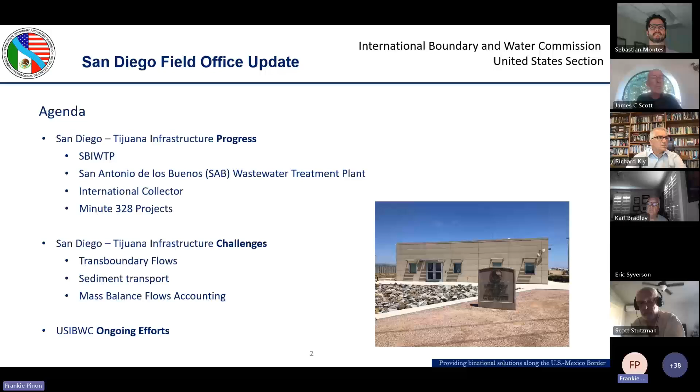Yeah, there's a lot of stuff going on at the border. What I want to first start off with is some of the things we're making progress on, such as the wastewater treatment plant repair and rehab work being done down at the San Antonio de los Buenos wastewater treatment plant, that we'll call SAB. The international collector, which is in Mexico, brings a lot of the flow to the plant. And the Minute 328 project, the combination of Mexican and U.S. project along the border.

I'll also talk about the challenges we have. I think we all know what those challenges are: the transboundary flows down the river, through our canyon, the sediment that comes across the border, and just accounting for all the flows in the San Diego, Tijuana wastewater infrastructure. And then we'll talk about at the end what we're doing to keep things moving.

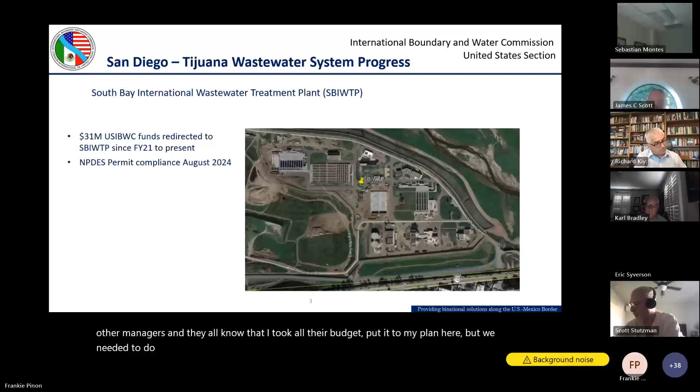Okay, as the commissioner mentioned, we have moved about $30 million from the IBWC budget to address the issues at our plant. It's very awkward for me, because when I was at the managers meeting at headquarters with all the other managers, they all know that I took all their budget to my plant here, but we needed to do that. The plant is currently out of compliance, and these repairs we're doing now—our target is to regain compliance in August, compliance with our NPDES permit, National Pollutant Discharge Elimination System permit, which is issued by the Regional Water Quality Control Board.

So this is some of the work that has been going on at the plant to bring it back up. These are the major components, so starting off with the influent pumps.

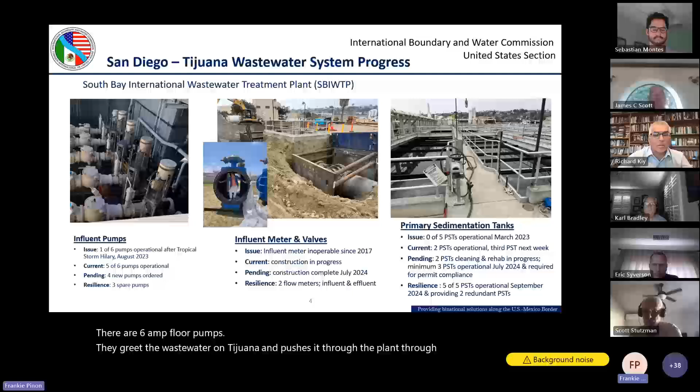There are 6 influent pumps that take the wastewater from Tijuana and push it through the plant to primary and secondary treatment. After tropical storm Hilary, we were down to 1 pump because of all the excessive flow, trash and sediment that came through with that storm, which took out all of our operational pumps except for 1. This is critical, we almost shut the plant down. Today we have 5 operational pumps, and we have 4 pumps either on order or getting repaired, so we'll have 3 spare pumps.

One thing we did learn from Hilary was that we must have spare pump motors on hand, so when we have these accidents we can swap it out very quickly. These pumps are about $500,000 each with about 9 months lead time for the pump, so we'll have some spares.

The influent meter is a project we've been trying to complete. We started this over 2 years ago. This will give us a second meter to measure the flow coming into the plant. We've since been relying on the effluent meter at the other end.

Here's a picture of our commissioner inside one of these valves, just to give you an idea how large these are. These aren't valves you pick up at Home Depot, they're custom made. I think it took us about 1.5 years to get these, it's a lot of time to get this work done and get the material we need. This project will be completed by the end of this month, and again this will give us redundancy in our metering.

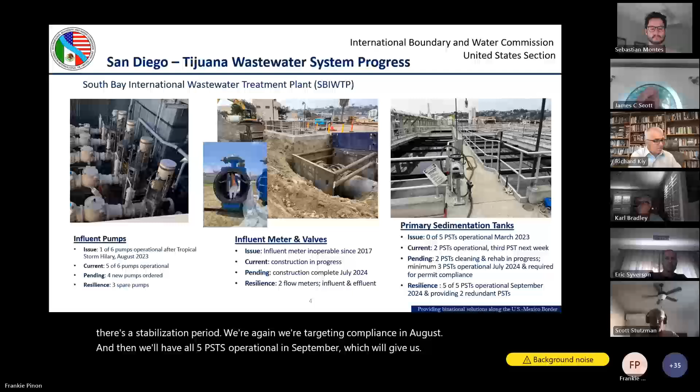Junction box 1 is also critical to this plant. This junction box is a concrete box with a metal pipe going in and a pipe going out to the plant. This is where the flow from Mexico comes into the US, comes to this box, and then goes to our plant. It's been inoperable for a number of years, the valves have broken off or are stuck in position, so you've not been able to control the flow of the plant. So whatever comes from Mexico, we treat, even if it's above 25 million gallons per day. This is the source of a lot of our problems, the excess flows over a long period of time.

So we awarded the contract a while ago. We're in the 90% design phase right now, and our schedule has us constructing and completing this new box, J1, in February of next year. This will give us control of flow of the plant.

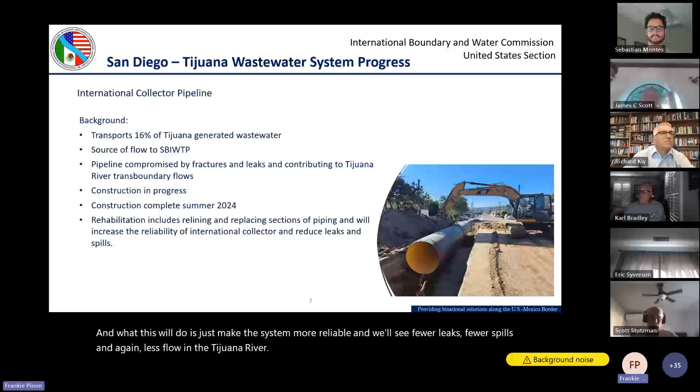So I just want to summarize the previous slides and all the improvements we're making. Junction Box 1 is supposed to be done in February, giving us control of the flows to the plant so we don't suffer from the excess flows.

The international collector is to be done later this summer, and this will prevent spills or flows into the river.

And then we have the wastewater treatment plant here. This is supposed to be operational, partially, in September or thereabouts.

Pipeline 1A was ruptured back in July 2022, which caused a lot of problems for us. We lost some capacity here, so instead of flow going through here, we were getting a lot of that flow into the plant.

Excess flows over a long period of time. This has since been fixed, but we're having some trouble getting it back online. This line right here is adequate for now for flow.

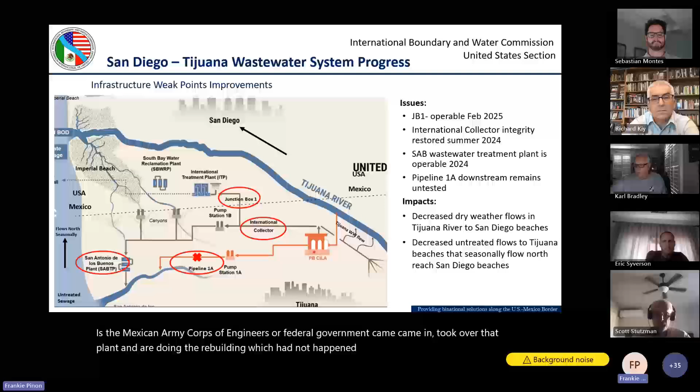There's a part of the story maybe not everybody knows: the Mexican Army Corps of Engineers, or federal government, came in and took over that plant and is doing the rebuilding, which hadn't happened before. They have double shifts of Mexican Army construction workers from all over the country doing it. A couple of points on the timing.

They've said it should be online by the end of September or October 1st, when they plan on flipping the switch at the plant. They readily acknowledge there may be multiple problems when they see what happens when they flip the switch on, but they're committed to that. When you saw the pictures of the tanks while we were there, they put up the first wall on the side of the tank while we were there.

It's a little hard to envision in a few months, but for oversight, it's part of the minute order, which relates to the USMCA treaty, that our government and our official, with the chair, go to these meetings to ensure it's done. I think there'll be multiple issues with it, but there is a plan to ensure it keeps going, and there's a lot of scrutiny on it.

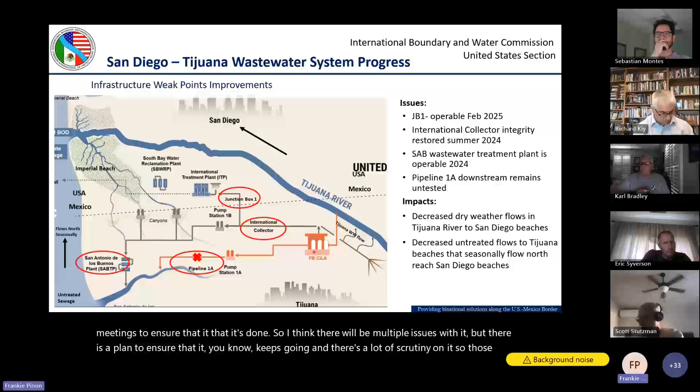So those meetings are between their diplomats, right? Because our USIBWC is under what? It's under our State Department. That's why the U.S. consulate is the one organizing these meetings, and why U.S. Congress members are going.

Yeah, I have a few more questions. So what you said, that the international collector is being rehabilitated — so it's not in service right now?

We are getting close. We're averaging right now about 18 million gallons per day at the plant, out of 25.

When the international collector is being repaired, flow is coming through PB CILA instead, being rerouted through the federal government's pumping station. PB CILA is the Mexican pumping station — it just pumps out of the river. So whatever's in the international collector now is being rerouted, and goes to Tijuana, but it's not at full capacity. But my point is, the only way we get water through the plant is through the international collector. That's correct.

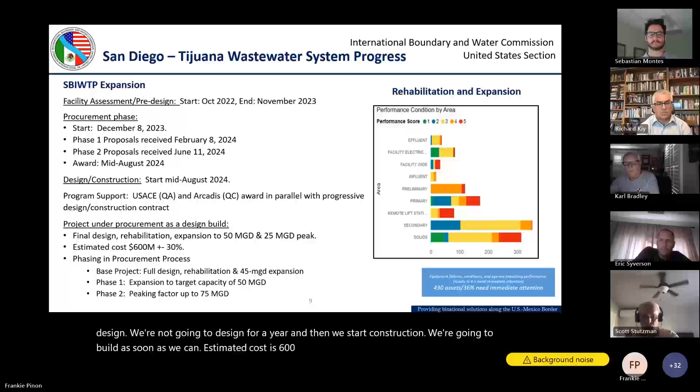As soon as we award this project, we're going to start the design and build. We start designing as soon as we have something to build, and build right alongside our design — we're not going to design for a year and then start building as soon as we can. The estimated cost is $600 million, give or take 30%, which is a lot. We won't know the exact cost until we go through negotiations with our selected contractors.

We have the project in phases based on our funding. Phase one is 45 million gallons per day. Once we get additional funds, we move to 50, and then the last phase, if we're fully funded, is 600... it's 50 million gallons per day with a peak up to 75 million gallons per day.

As far as the funding right now, we had 300 million from USMCA. We recently received another 100 million, and another 100 million budgeted to IBWC. So we're probably short maybe 200 million based on the 600 estimate. But again, we won't know the cost until we finish negotiating.

Okay. Are there any more questions from the board?

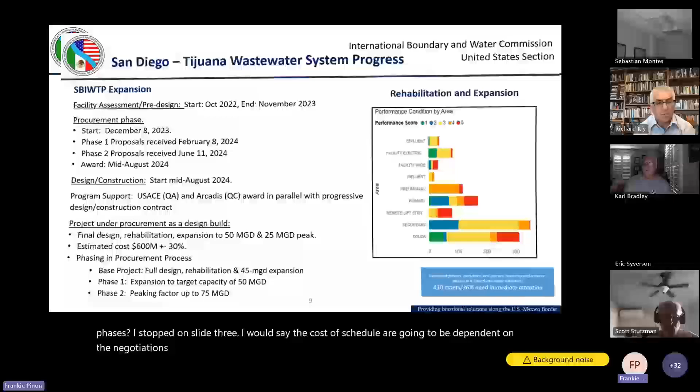That's the question I get the most from citizens: okay, we're going to expand up. Obviously, the peaking factor of 75 million gallons per day is approximately 90%, or close to the heaviest flows we've seen. I'm just guessing when I talk to them, or giving a slightly educated guess, hopefully, of what kind of time frames we're looking at on the whole project. I don't want to overly commit you, but if you have any comments, that's great.

They may help us, but we're talking a few years, then, right? Two years for what, for the construction start? No, that's just the start to get into the work. Like, for instance, phase one, when do you think we would get the phase one expansion to target capacity?

We'll tell you, as far as the schedule and cost, we'll have that in about a month, once we negotiate. My guess is we're going to start construction as soon as we can. So this could be a long phase one or base project. Completion is probably two or three years out. So that's my guesstimate. We'll work on the rest of the funding.

All right, thank you. Got a little hint, three years, maybe up to five years. So it just depends, again, on funding and contractors.

Okay, thank you. Oh, sorry, Ryan. No, okay.

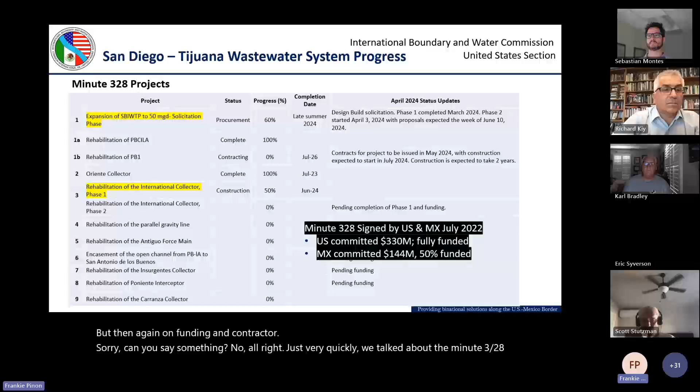Just very quickly, we talked about the Minute 328 project. There's a list of projects, and they're all projects at the border. As the commissioner mentioned, the U.S. has committed $330 million to the project, that's primarily just the plant. Mexico has pledged $144 million, and they have funded half of that.

The fact that they've only funded half of that doesn't mean they're not committed. Their funding process is such that if you don't spend the money by the end of the year, you lose it. But they're only going to fund it if they're ready to do the work. So we feel they are committed.

There's a lot of projects here. I highlighted the ones that are ongoing right now. This is the treatment plant, and this is the rehab of the international collector, which is ongoing. Next slide - lots of pipeline rehab projects, pump station upgrades. This is a good one.

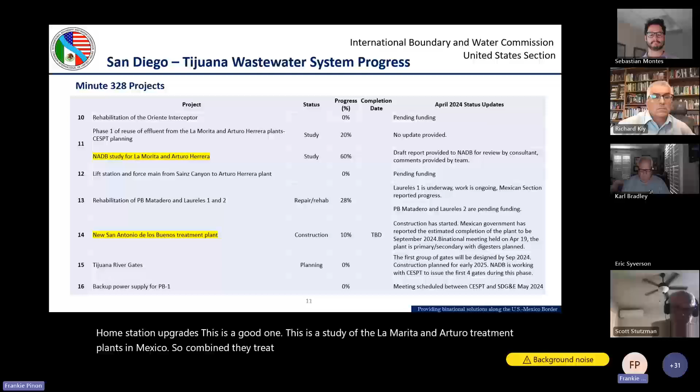This is a study of the La Morita and Arturo Herrera treatment plants in Mexico. Combined, they treat about 10 to 12 million gallons per day, secondary treated, just like our plant, and they just dump it in the river, adding to transboundary flow. So this study is to reroute this treated water back to the reservoir or some other better facility.

And then there's the SAB plant construction, but there's a whole up to 16 of these projects here, funded by Mexico and the US in some combination. Okay.

Morning, I have a question about that slide. Okay, we can take it back. So number 13, it says rehabilitation of the pumping station at Matadero, Laureles. So I know we've had some flow across Matadero Canyon lately. Can you tell us a little bit about that project?

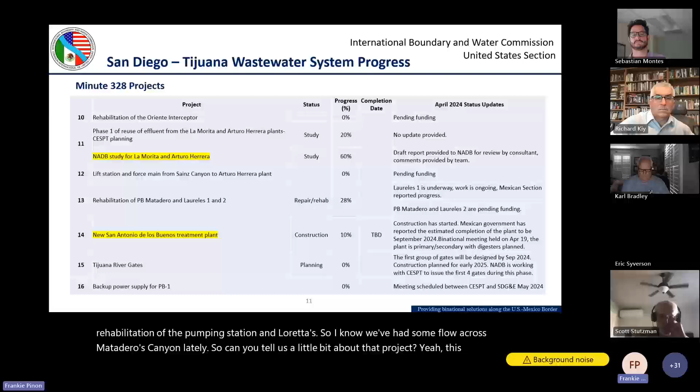Yeah, this one is funded, it is underway - addressing the flow that goes through the canyon lately.

I'm told the latest is that this will be partially coming back online later this month, so we'll see some reduction in flow. Number 2 is not funded, there's no contract yet on the Matadero. This Matadero is contributing to the flows through smugglers, and yeah, this has been a problem for us.

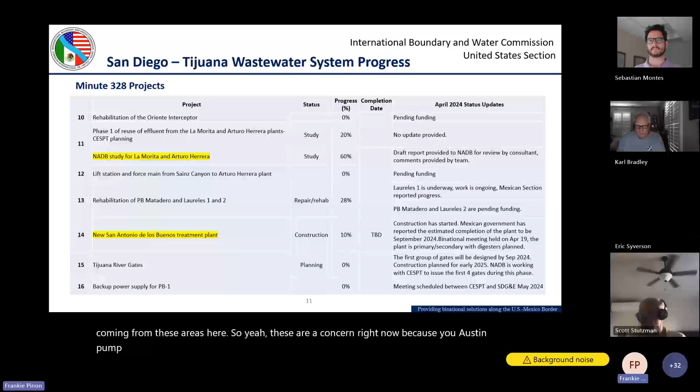I'm actually going across the border with my counterpart tomorrow to view the flows coming from these areas. So yeah, these are a concern right now because all the pump stations are down, and these are contributing to flows to the canyon.

Morgan, is the flow coming down to smugglers now because PB Matadero is not working? I would say it's partially working. There was a leak, a rupture over the weekend, a big surge of flow. They fixed that, so the flow should have gone down since then, but there still is flow. That flow is coming from the pump station. Not sure why.

I don't know if the public knows, but Matadero's Canyon, Laureles, is both about 5 miles long. Matadero, when it crosses the border, we call it Smuggler's Gulch. Laureles, when it crosses the border, we call it Goat Canyon. It's a geographical feature, a river, water flow across the border.

I just want to make a brief comment that came out of the visit to Mexico. The commissioner may talk about it more, but it's just a brief comment. There are unidentifiable flows occurring right now that the Mexican government does not know where this volume of water is coming from.

Sounds bizarre, right? And they say, well, don't worry, it's not sewage, it's clean water. Well, if you don't know the source, how do you know it's clean water?

Then the other big issue for USIBWC is water goes in the river, it's mixing with dirty water regardless, and creates flow issues with some of the questions you're asking earlier. So that's something they are investigating. We hope to get more information next week.

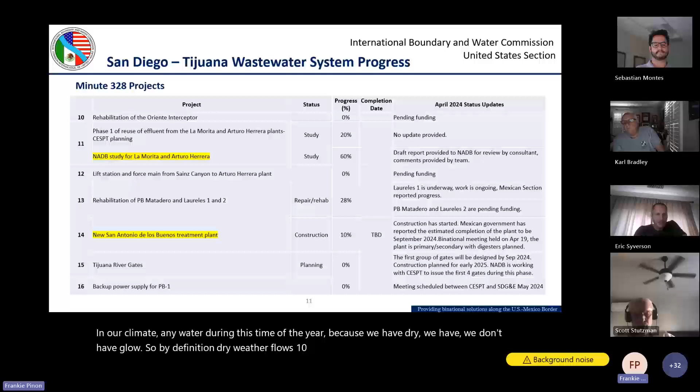Well, you know, in our climate, any water during this time of year, we have dry weather, we don't have flow. So by definition, dry weather flow ten months out of the year is de facto sewage. That's the definition the EPA gives.

And I know I see those rehabilitation of the Matadero and Goat Canyon and Smugglers, but I was looking at the EPA plan, and those various pump stations are to be decommissioned under the EPA plan. So it seems as if they're rehabbing them, but if this project goes full blown, they're going to in fact be decommissioned.

And then all that volume, according to the EPA report, is 12.7 million gallons a day, and that will be coming into the United States. Of course, Goat Canyon and the Smugglers Canyon collectors have to take up that volume, but the pipes aren't sized for that yet. So there's some coordination issues here too.

This is some glaring item that will need to be addressed, because part of the problem that kills our plant is sand, rocks, gravel. If you have that kind of flow coming in, that kind of sediment is also going with it into our pipes. So that means those really have to be completely retrofitted and resized. Those are glaring scopes of work that need to be addressed.

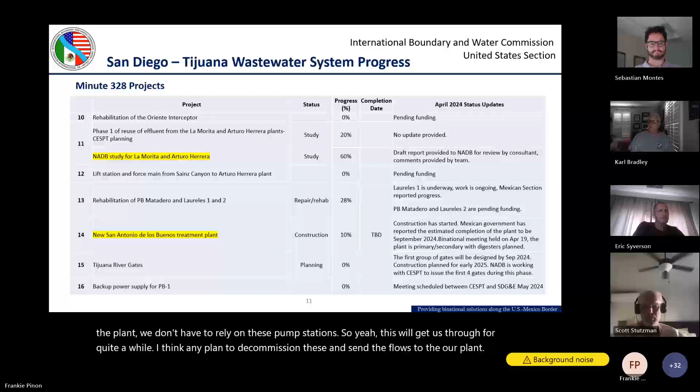Okay, and I would say that is a very long-term plan. Ultimately, we'd like to not rely on the Mexican pump station once the treatment plant capacity is increased to 50 or 60, and we just gravity flow from Mexico to the plant. We don't have to rely on its pump station. So yeah, this will get us through for quite a while. I think any plan to decommission these instead of flow to our plant is way out in the future. But good thoughts, I appreciate it.

Oh, also one other thing. You talked about refining dry weather flows and sewage.

The flows that are in the river are definitely sewage, a mixture of the treated water from the treatment plant. There's groundwater from the rain, and whether that's still impacting or not, I don't know. But Mexico claims we did have a lot of rain this year, and that does contribute to groundwater seeping into the river. There's likely some potable water leaking and everything else. So not a lot to it.

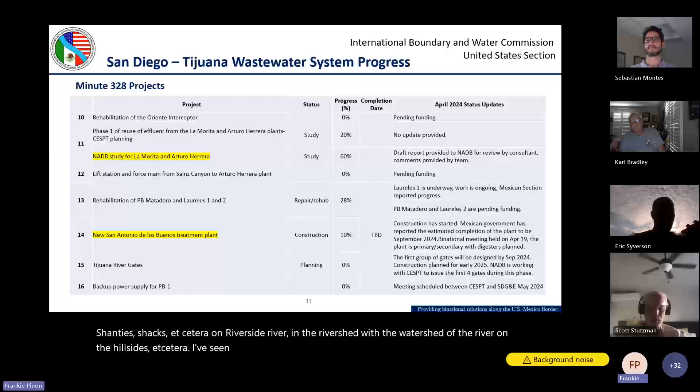At our last meeting, our colleague did a presentation regarding some of the unconnected sources of pollution, including some of the factories, but a lot of shanties and shacks that are on the river in the watershed, like big on the hillside, etc. I've seen those, and they appear to be growing in number as people are attracted to the water area.

We also know that there are subdivisions that aren't connected - that's part of that report. It would really be great if we had a sort of top-down view of where these sources are and what is going to capture them in terms of the work that's being planned and done right now.

To me, there's the question of whether all of this investment in infrastructure on both sides of the border is actually addressing the new development, like all the big informal projects. And how much is going to be left over on the Mexican side that still is going to make its way across the border. I guess the question is whether those flows will be captured by the treatment plant and its capture infrastructure.

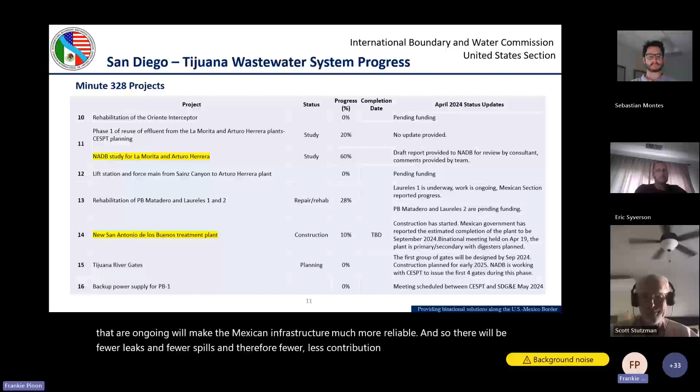Well, I would say that the new infrastructure, all the projects that are ongoing, will make the Mexican infrastructure much more reliable. So there'll be fewer leaks, fewer spills, therefore less contribution to the river. I'm not sure that any of these projects are new developments with new pipelines going to new developments - I think they're all existing pipelines that are being repaired or rehabbed.

I'm not sure if I answered your question. I think my question really requires a top-down satellite view of the watershed, where the pollution sources are, and which parts of the current and future infrastructure improvements are going to capture it. We don't have that - it's very difficult, even for somebody like me who follows the structure here, to have a comprehensive view of source and treatment, and what's left over, what's the remainder of that fraction.

Let me answer that. Next slide. Someone else.

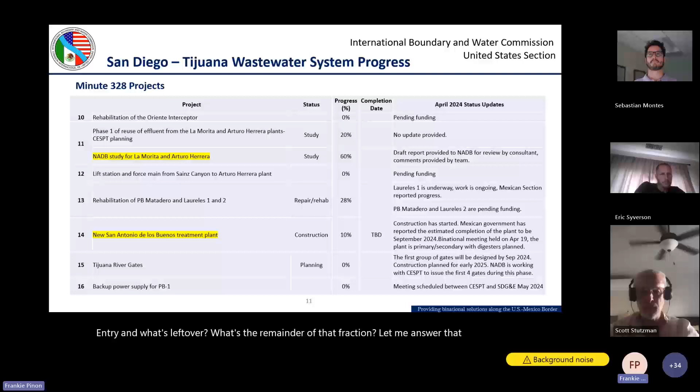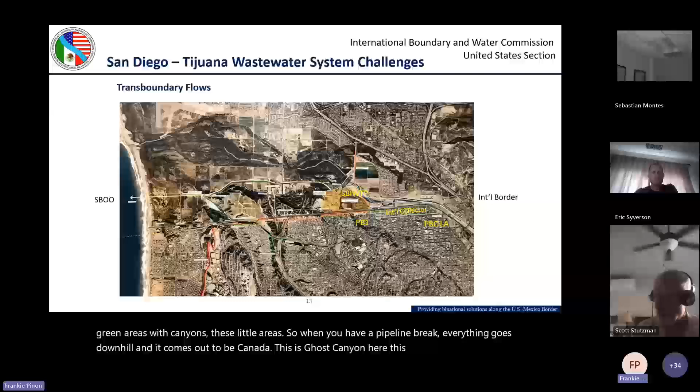Discharges out the beach here. We also get discharges through the canyons - these green areas are canyons, the low areas. So when you have a pipeline break, everything flows downhill and comes out to the canyon. This is Goat Canyon here, this is Smuggler's Gulch, this is Del Sol, Silva Drain, and we got Stewart's Drain over here. We try to capture all the flows and they go to the plant.

Okay, this is just a diagram of the Hollister pump station. And this is currently out of commission.

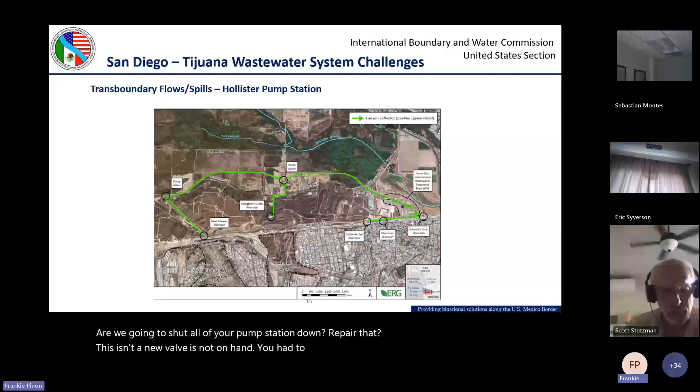I don't know if I mentioned this before, there was a surge tank. So, last month, a pressure relief valve on a surge tank at this pump station was stuck open and caused a spill. We had to shut the Hollister pump station down to repair that. This isn't a valve you have on hand, you had to order it. At the same time, we had to clean out the surge tank, which was filled with sediment. That was the cause of the valve failure.

So this is out of commission right now. This is Smuggler's Gulch Canyon collector, it gravity feeds to the pump station. This is the Goat Canyon collector, it gravity feeds to this pump station, and then this pump station goes to Hollister. So if Hollister goes out, we have to shut this canyon collector down, and that's the case today. That means all the flow is not captured, it just goes downstream. I know this is starting to flood here, and it's come over this direction.

Before we could put that tank back in operation after cleaning, we have to get it certified. We did that last week. Results of the testing for certification we should get any time now, and hopefully they'll tell us the tank is good so we can put it back in operation. It's an old tank, so we're crossing our fingers.

We're already looking for a new tank. We're also considering a new piping scheme where we don't need these surge tanks, so we're looking ahead in case we have to replace these tanks and can't put them back into operation. But we hope to get this back into operation as soon as possible. We do know that these flows here are just unacceptable, and I am going across the border tomorrow with my counterpart to see where these flows are coming from. I know they're coming from the pump station upstream, but if there's something we can do to reduce or stop these flows, we will.

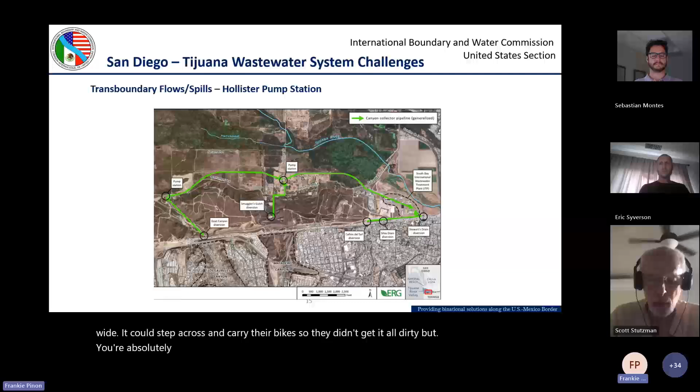You're absolutely correct. I had a discussion with the city. We will have signs; next time there's a spill, an officer will have a sign on both ends. Thank you.

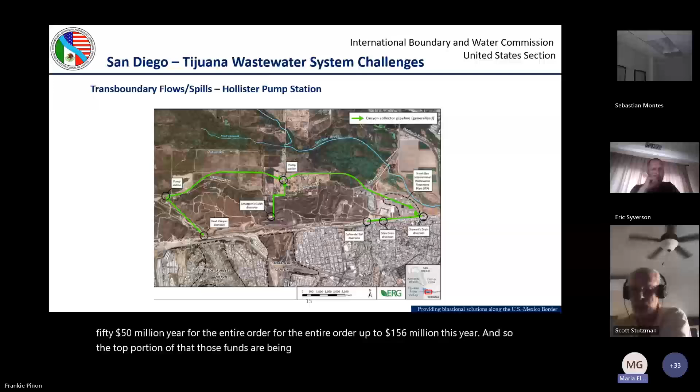But part of that, and what Morgan talked about, is our construction budget was tripled. It went from $50 million a year for the entire border up to $156 million this year. A good portion of those funds are being allocated to this plan. I can't share the exact amount because I'm still waiting for Congress to approve my operating plan. We're almost at the end of the fiscal year, but processes are processes I must adhere to.

Anyway, we did fund that water quality monitoring we're also going to be doing on the canyons, and this is now being integrated permanently within our budget. That's all I wanted to add.

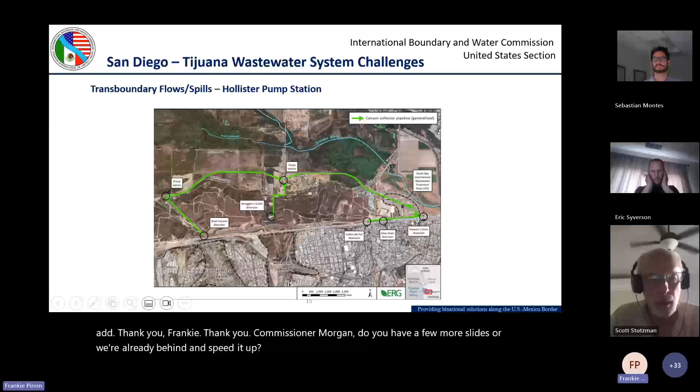So the flow comes in, goes into the box here, and then it gets pumped back to a pump station. When you get all this sediment, it clogs up the box here, and we have to shut down. And when we shut down, then we have transboundary flows. This is an ongoing problem, one that's gotten worse in the last year.

Next slide. And we also get this sediment, not just in the canyon collectors, but also coming into the plant, and it ruins pumps and valves. It causes a big problem. Next slide.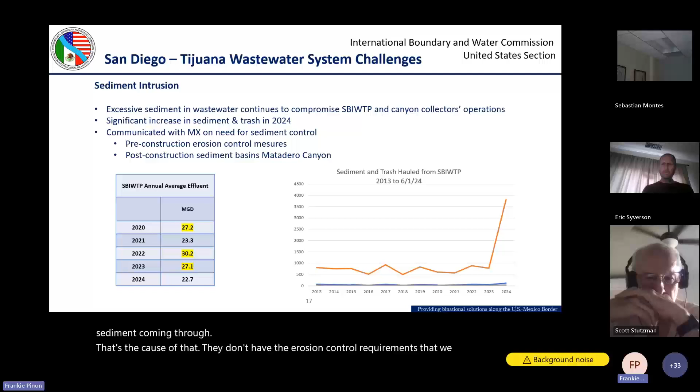Now somebody said, well, you get all this excess flow into the plant, of course you're gonna get more sediment, but this is huge. We've actually averaged 22.7 million gallons per day this year, much less than 3 out of the past 4 years. So there is more sediment coming through. As the cause of that, they don't have the erosion control requirements that we have in the United States. There's a huge construction project on the other side of the border from Smuggler's Gulch. No erosion control. All the brush has been taken away.

Sediment is a constant issue with us, and we always bring that up in our meetings with our counterparts. Next slide.

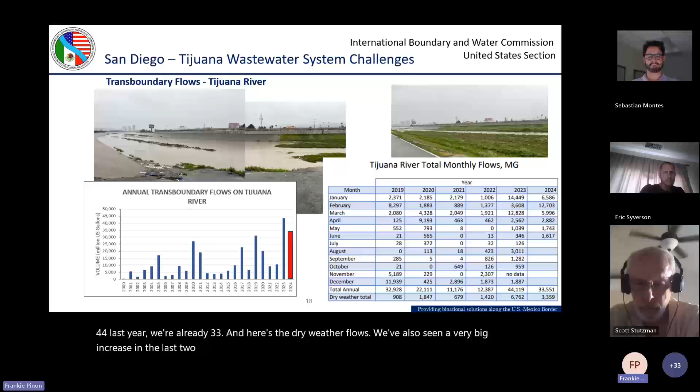Okay, this is just to show you the flows in the rivers. So we're getting a lot of flows. Last year was big, and we're only halfway through this year, and we're already up to 33 million gallons so far. This is a comparison of each year, total annual. 44 last year, we're already at 33. And here's the dry weather flows. We've also seen a very big increase in the last 2 years. Okay, next slide.

Okay, this looks pretty messy here. This is a slide given to us by CESPT, the wastewater provider in Tijuana, Mexico. It just shows all the flows we should expect during dry weather season: zero flow in the river, 25 million gallons per day at the plant, and up to 50 million gallons per day down the SAB.

This is kind of hard to focus on, but we've been averaging 45 million gallons per day in the river, 18 million gallons per day at the plant, and then down here, instead of 50, we're seeing 22.

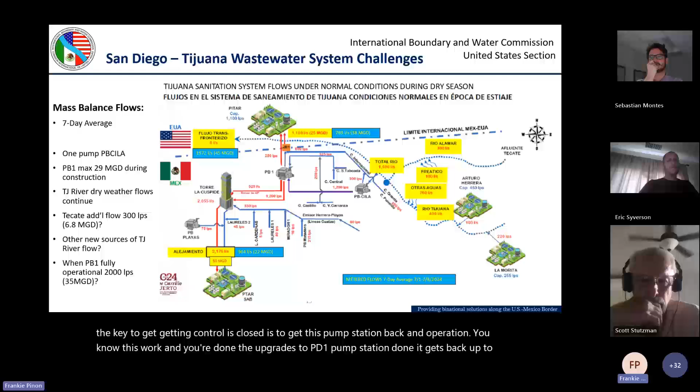So this tells us, I update this every day. We have meters here, here, and here, all the outputs of the system. This gives me a good idea of what's going on. It tells me we're not getting enough out of this pump station here. We know that. So the key to getting control of these flows is to get this pump station back in operation, get all the upgrades to PB1 pump station done and back up to speed. Right now we're seeing about 12 million gallons per day, and this should be seeing 35.

So this is us talking about the mass balance, where everything's going, or where the sources are. This is what we're getting at. We have tables that we work with our Mexican counterparts to plug in the values. We do the analysis, the mass balance, to see where the flows are coming from, where they're going, make sure everything equals out. This gives us an indication if something's going wrong, not just that we got too much flow in the river, but that there's not enough here. It points to this pump station right here.

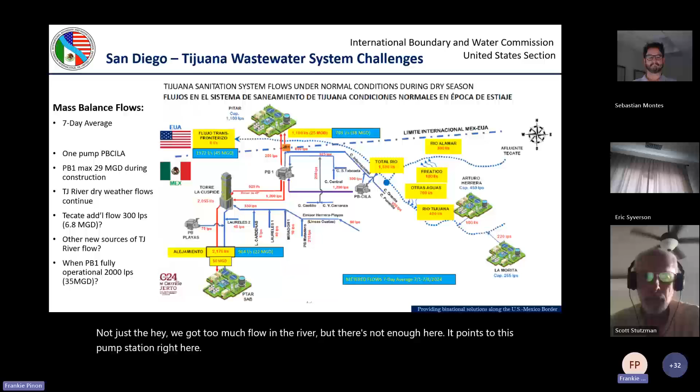And that's with one pump on at PBCILA. We are diverting some flow to the river. It's not much, and these projects should be done in the next couple of months. Then we should see PB1 start ramping up again, and additional pumps at PBCILA coming online, which will reduce flow in the river. Okay, next slide.

Okay, this is the last slide. This is what we're doing, what we've been doing, and what we'll continue to do.

Continue with the repairs and upgrades to the plant, continue with the expansion. We have regular meetings at the commissioner level, as well as at the principal engineer level. We're monitoring the Minute 328 projects, also the SAB, and sediment control is a constant, it's always on the agenda. We're trying to get them to implement some erosion controls in their projects.

I have bi-weekly meetings in my office with my counterparts. We go over specific projects, make sure we're coordinated. We accompany CESPT and my counterpart monthly, driving down the river to see where all the inputs are coming from and note the conditions. After we've done it a few times and seen big changes or a lot of flow somewhere, the next step is to investigate that. Then we get into mass balance reports, sharing data with our counterparts, trying to figure out where all the flows are going and coming from, ultimately to try to reduce the flows in the river.

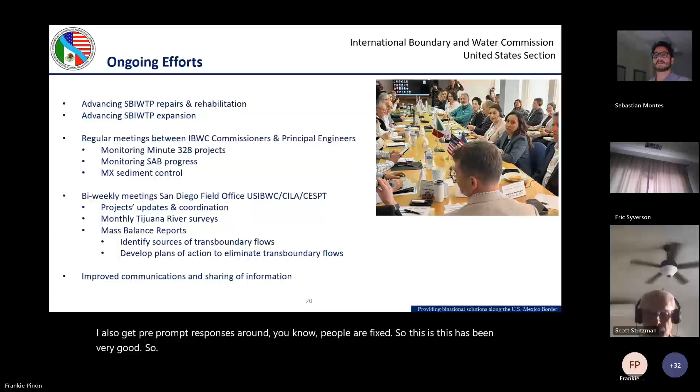First of all, thank you so much for actually dealing with all this. Everyone's probably telling me so many things, but the fact that you're actually doing it, I really appreciate it. I wanted to ask specifically about the Hollister pump. In your expansion design, is there a way to create redundancy with that pump? Because clearly it being out of commission has a large impact in many different ways, and because it feeds multiple different avenues, it seems like it might be a powerful place to have redundancy, if that's part of your expansion.

Good question. The pump station has 4 pumps, and we only need 2 pumps, so it already has 2-pump redundancy. The problem is really the sediment coming through. I think our plant design, we hope, will include some sort of sediment removal, at least for the plant. And we're looking at ways to reduce the sediment at the canyon collectors. Actually, our plant operator is working on some design for trash and sediment collection. I think he's going to present later on tonight. So yeah, it's really a sediment problem at Hollister.

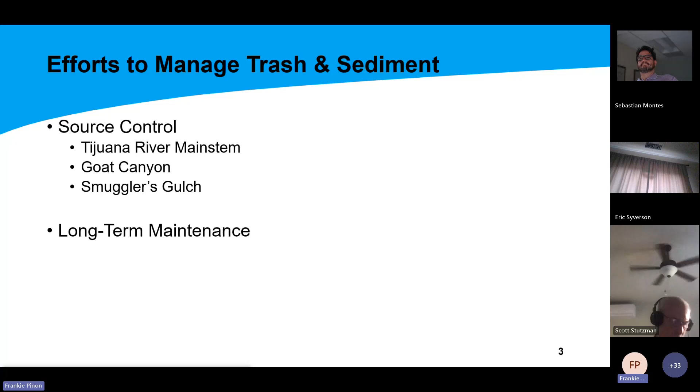Okay, next slide please. So just for a little bit of background, I think most of you know we did a study that we completed in 2020 that looked at the issue from a couple of different lenses. We looked specifically at transborder flows in terms of the sewage issue, but then also in terms of trash and sediment. And really what our study demonstrated is we need to deal with these issues a little bit differently. Morgan was highlighting a lot of the sewage issues, and really the attempt to get the flows within the pipelines, send them to treatment plants, and treat the water. The trash and sediment is a little bit different; we can't do that, we can't just send it to a treatment plant. So what we're looking at is 2 different things. The first thing is source control.

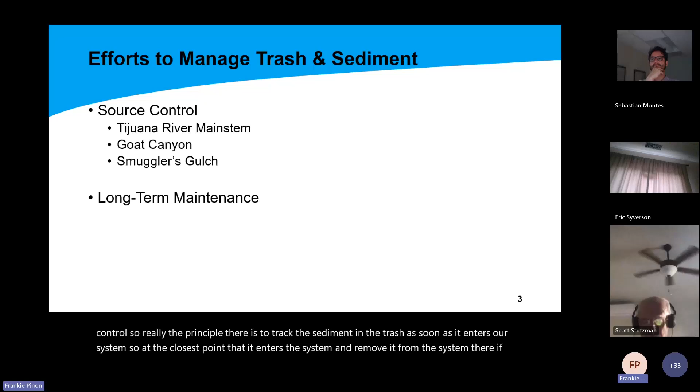The principle there is to trap the sediment and trash as soon as it enters our system, at the closest point, and remove it from the system there. If we don't trap it at the source, it just flows and enters the rest of the river valley, which is a lot of what we're dealing with right now.

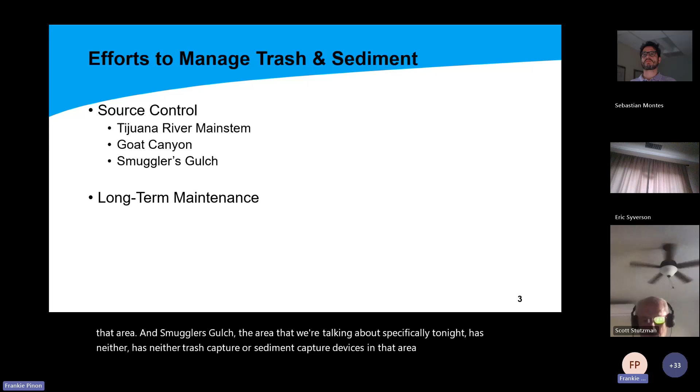A lot of you know the IBWC is working on some trash booms. There's conceptual design for trash capture at the main stem of the Tijuana River. The Goat Canyon State Parks has infrastructure for both trash and sediment capture. Smuggler's Gulch, the area we're talking about tonight, has neither trash capture nor sediment capture devices. So what we've been doing to handle the issue there is annual dredging, removing accumulated trash and debris each year, and it's simply not efficient.

So what I'm talking about tonight is our two efforts: one is that maintenance we're still doing, but also our larger plans for infrastructure in that area, really to get at this source control issue.

In terms of Smuggler's Gulch, historically the county has done the dredging south of Monument Road, and the city of San Diego has done the dredging north of Monument Road, as well as the pilot channel. We've been working closely with the city to coordinate our efforts and do the dredging together, not separately like in the past.

This year we were able to leverage county funding with an additional 4.25 million from the state, so 5 million total to do this dredging work. That's the dredging work we're doing right now. It will cover the entirety of Smuggler's Gulch, north and south of Monument Road, as well as much of the pilot channel as we can.

This year we had really unprecedented conditions. There was a lot of flooding in the river valley, which resulted in one of the berms breaking—essentially the walls of Smuggler's Gulch have these berms. One broke on the western side, resulting in flows from Smuggler's Gulch entering our campground. We're working closely with the city to repair that berm.

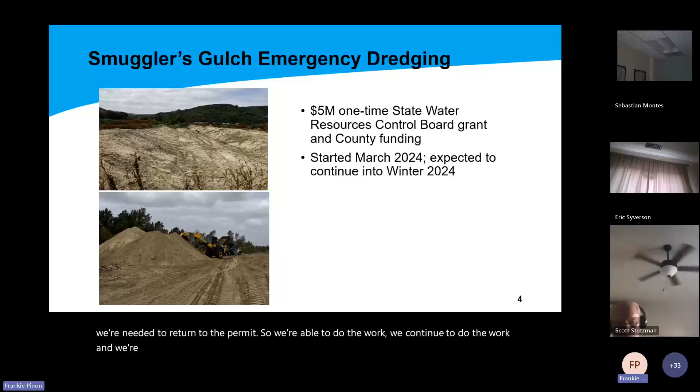This year, because of the emergency conditions, we were able to get emergency permits to do the work. Normally our regulatory permits restrict us—we can only do dredging between September and March. But due to the emergency, we're able to continue past that March deadline, provided we have biological monitors and other measures to meet the terms of the permit. We expect that work to continue through the end of this calendar year.

In terms of long-term work, our intention is to do source control right where Smuggler's Gulch enters the United States, which happens to be on our county property. We received a $10 million grant from the State Coastal Conservancy to put in trash booms, as well as sediment capture infrastructure right there where the water comes into the US. We're currently in design for that project.

I don't have a lot of the details. I know in the past folks have asked how we'll operate and maintain those facilities. Since we're still in the design phase, I don't have those answers tonight, but once we get further along, I'm happy to come back and speak to you about the specifics of that project.

We also received federal earmark funding through the EPA to do another round of dredging. Our long-term plan includes dredging for the entirety of this year, then another complete round of dredging, to have two full cycles before we put this infrastructure in Smuggler's Gulch. We're really trying to maximize the capacity of both Smuggler's Gulch and the pilot channel before we install that infrastructure—we think that will set us up for success long-term.

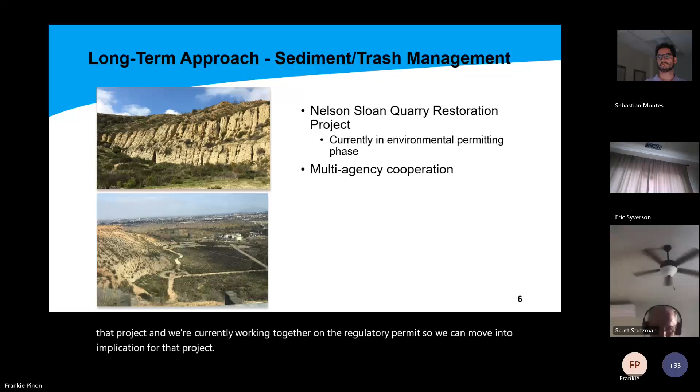Follow up, yes Leon. I've been on this project probably for about 10 years. The approach that the county has taken is not to recognize that the river has changed location. There's been at least 5 sediment studies done, and none of them look at where the river is.

As you can see, the brown part is where the river is now located. By changing the river, it doesn't have the fall, so you're taking away all the energy that it had when it was a confined channel.

Where's it gonna flow? Where's it gonna flow? Well, hold on, let me just show you. There we go, I want to just show you this. The issue is you've got pilot channels, but where'd they go?

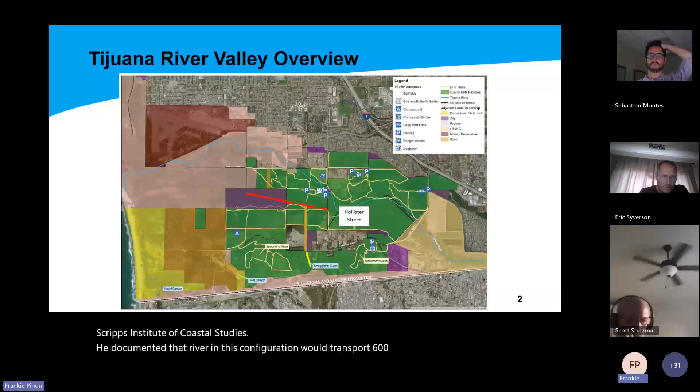According to the 1960s, 70s survey by Doug Inman, founder of the Scripps Institute of Coastal Studies, he documented that the river in this configuration would transport 655,000 cubic yards every year on average. So when you spread the water out, it doesn't have the energy in the main channel to carry it, and that's where you get the accumulation.

Also, you and I have talked about scouring - if you think about it, 655,000 cubic yards, a dump truck is 10 yards, so that means in a span of 30 days, 65,000 trucks have to go down that river. With stones, rocks, and sand, basically that scour cleans the river every year.

The other thing that's happened is there are accumulations of concrete, flat big pieces of concrete that don't allow the sand to roll. So basically you're spreading the water out and defeating the very essence of what the river does in this type of configuration. We don't get much rain, about 30 days a year, but in that 30 days that 650,000 has to come to our beach, and our beaches are getting narrow.

So it's a multifaceted problem, and I know wildlife regulations prevent you from going down the channel because you have to get these permits, but they have to realize that in the long term, restoring the river is the best ecological answer to maintaining the river.

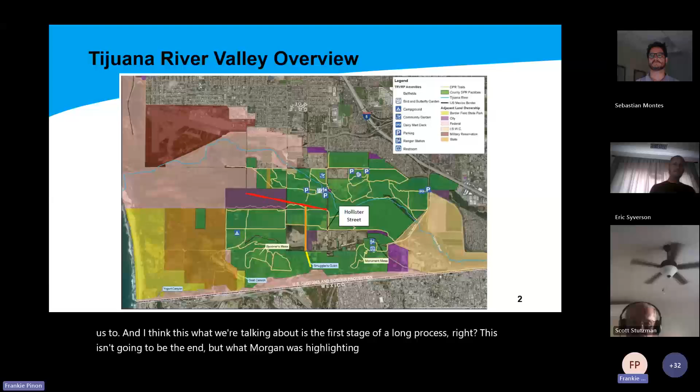This isn't going to be the end, but what Morgan was highlighting is we have a mass influx of sediment into the system. It's way higher than we've seen in the past, so much so that it's inundating the system, and it's collecting and pooling. So our strategy to remove that excess, capture it at the source, and get it out of the system is so that we can return some of those natural properties, some of the scouring conditions we'd like to see, as long as we can remove some of the excess sediment.

So I definitely understand, and your larger issue of restoration, I think, is a good point, but it's a different and much larger project than what we're talking about.

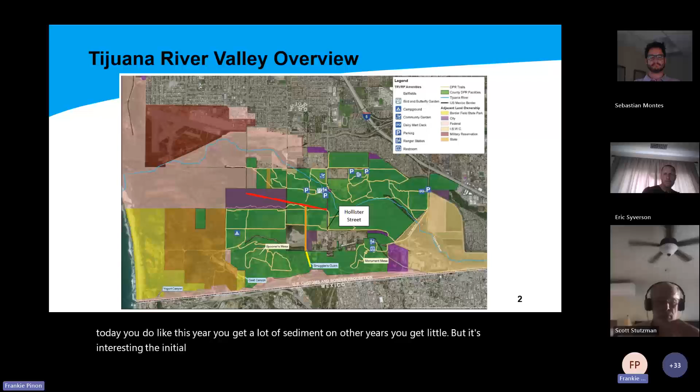Actually, when they did topographic studies in the 1960s, and then the IBWC did LiDAR radar and compared the flows on an average basis. Because a big rain year like today, you get a lot of sediment; on other years, you get little. But it's interesting, the initial prediction by Doug Inman in the 1970s was 655,000. The accumulation, according to the current LiDAR radar, is 640,000. So it's almost the same as it was in the 60s.

So I guess the point is that, yeah, we do have lots of sediment, but it's been building up since they changed the location of the river. It's been 30 years of accumulation. So the river goes like this, and the water spreads. So again, wildlife has to realize that we need to rechannel the river back to its original location.

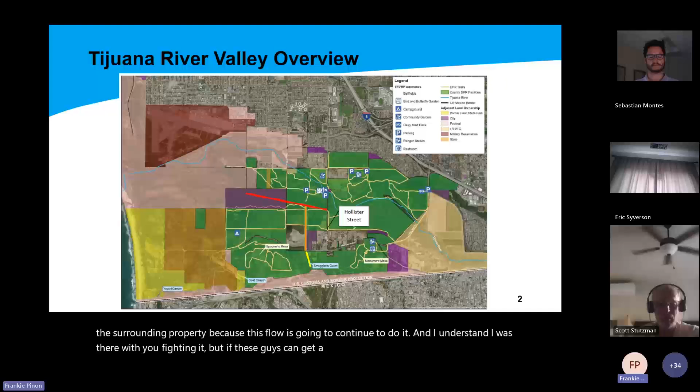But if these guys can get a permit from the federal government to go in and clear a 20-foot channel, then why can't the county? Maybe we need to help you guys talk to Fish and Wildlife about why ours is useless.

And just so you know the cost of this, Mrs. Martinez lived there, Mr. Rodriguez had a ranch there. All of those people were wiped out because the feds would not allow a pilot channel to go through west of the Hollister Street Bridge, the same channel that IBWC has maintained for 30 years.

And I'm sorry about this. I'm frustrated because I tried to avoid that when I was at the county.

The trouble is, taking the silt out of the valley and shipping it over to the old Nelson Sloan operation is not going to address the problem. You're still going to have a dam there, and you're going to be shipping it, which is not environmentally responsible at all. We should do what we did with the Mississippi River.

Let the river flow, and it will scour its own. And then let's see what level rise. How can we be taking sediment and putting it up on a hill when we need it on our beaches in Imperial Beach? We're a community surrounded on 3 sides by water.

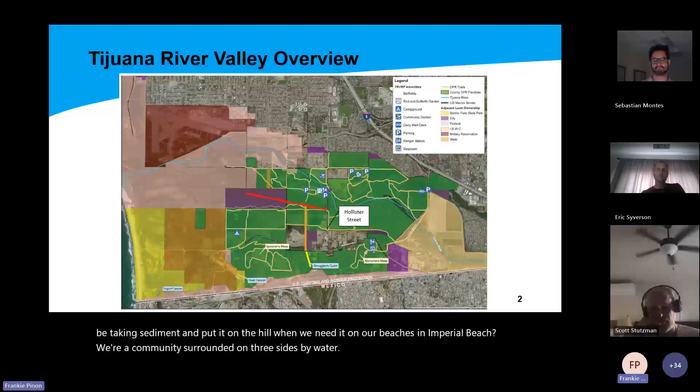And this project is to take sand that's supposed to go to the beach, right? Wouldn't it naturally go there? That is being shipped over and now being put on the highland.

And I understand you're doing the best you can with what you got. I've been in your place. But it's time, after 30 years, that we say, whoa, we've got to get to the source of the problem, and that is having the pilot channel where it's supposed to be.

And okay, what happened?

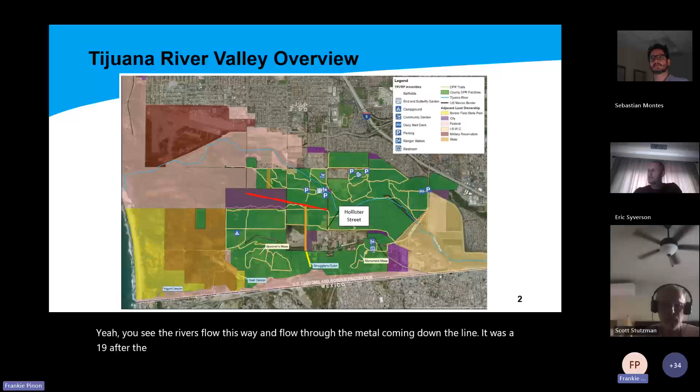You look at this, you'll see a natural river. You'll see the river flow this way. It flowed through the middle, coming down the line. It was after the 1985 flood that we came in, and that willow, they refused to clear it.

The IBWC clears it all the way in there. You can see the straight line here, and it clears all the way to the bridge. It's supposed to go west. Rivers don't do a 180 naturally. But the bureaucracy said you can clear a 20-foot channel to the bridge, but you can't clear the rest of it.

Well, come on, I've had a lot of work with sewage. When you plug things up, bad things happen. And this was a bureaucracy that we just didn't get together and say, not just no, but hell no. We need to have a clear path through the willow so the flow can go up to 4.5 knots, start scouring and do the natural thing. But as long as you have the trash, you've got to have that.

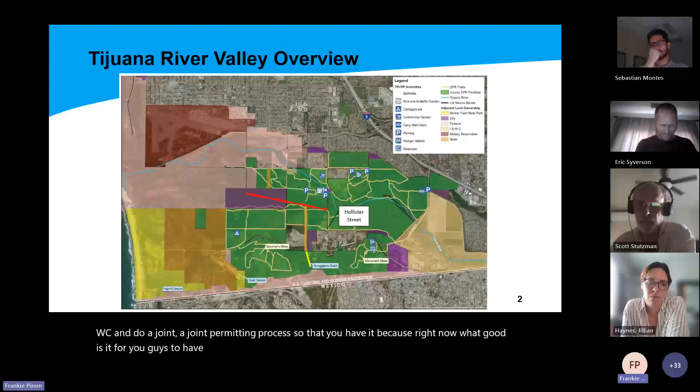And I really think the one thing the counties need to do is get together with the IBWC and do a joint permitting process. Because right now, what good is it for you guys to have that pilot program? The pilot channel, it stops. I've watched this my entire life, watching this thing where you've got so many federal agencies involved, and there's no coordination.

And I saw the county getting blamed for this problem. And frankly, I took it personal because I was in that fight too. The fact is, the real blame is everybody didn't get together and grab fish and wildlife by the scruff of the neck and say, where do you expect this silt to go? With sea level rise, this is the first line of defense for 25,000 people in Imperial Beach. That's why I worry about you talking about trucking it over.

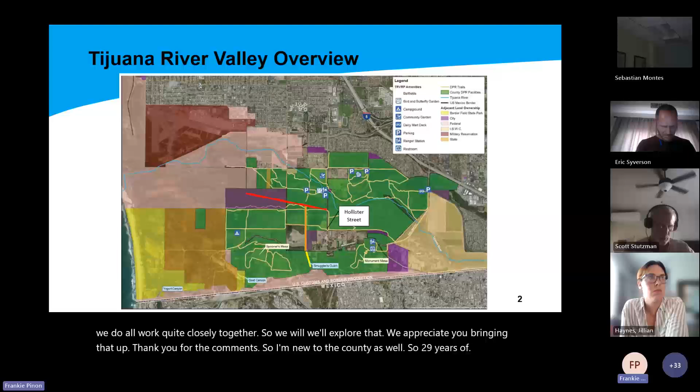Thank you for the comments. I'm new to the county as well, so 29 years of Department of Defense history of facilities management. We're here for a reason, to help find a solution. We'll partner. Thank you for the comments. We are partnering today, and we'll continue to work to find solutions. So we'll pick up the baton and run with it as best as we can.

Too bad it's too late for Mr. Martinez and Rodriguez, this collateral damage in this game, but this is a chance. Your project's a chance to say, where does the water go? Got to be a connection over to the title. Thank you.

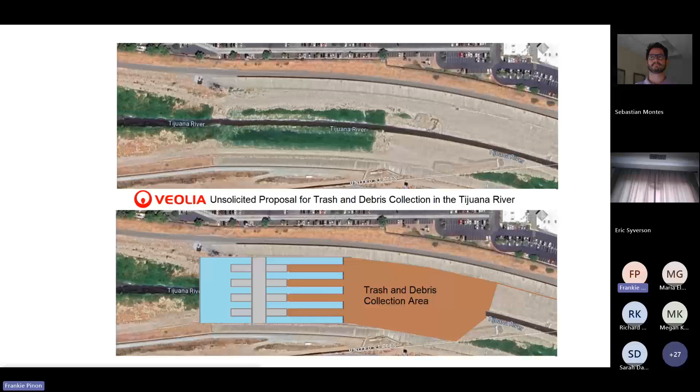Of what size, cobblestones? No, they won't pass. If it's greater than a quarter inch, it's not going to pass. It's going to stay in those brown areas there with the trash and debris collected.

It's just going to leak out the side. The water's going to seek its own level, and then it'll go on its way to the estuary.

You can see like a little side view with the access ramp, and then where the V filter wall would be.

There will be 8 individual walls, 2 in each. As the flow comes in the inlet, it's going to ooze out on the other side with the water. The trash and everything will be in there. On the outlet side, if you're looking towards Mexico, you'll see 4 access ramps and then 4 open areas for the water to come through.

So, any questions, comments?

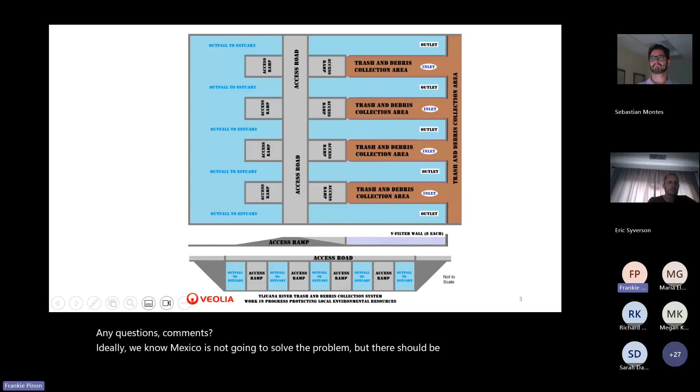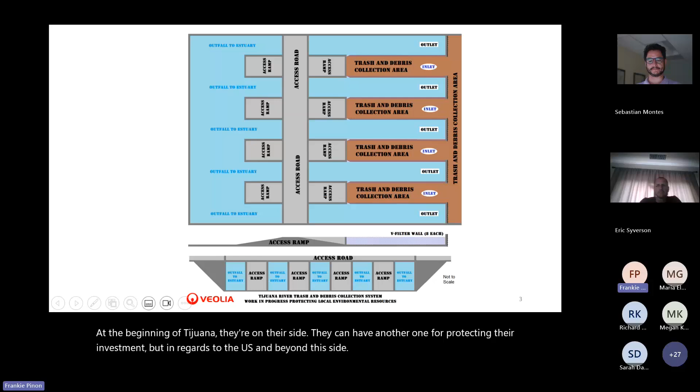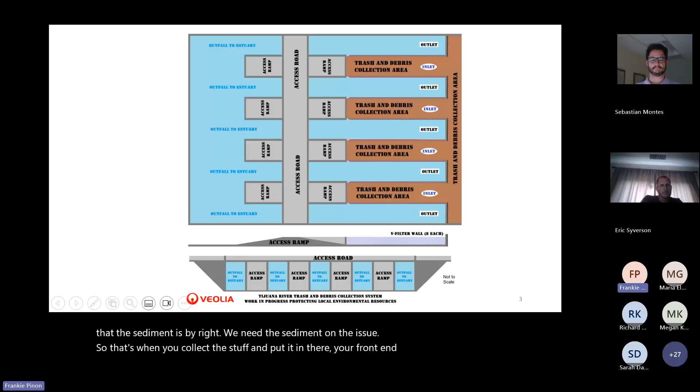When you collect the stuff and put it in there, your front end loader, they do have sifters and graders and stuff like that. They have a McCloskey or similar out there right now for the canyon, removing all the trash and debris. One thing that will happen is after the rain event, all the plastics and stuff will be on top, but there's a lot of clothing, little kids' toys, you name it, it's there.

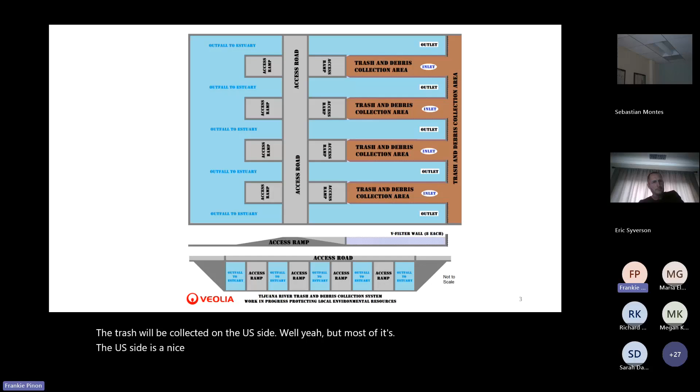So trash will be collected on the US side? Well, yeah, but most of it's... Oh, the US side is the nice blue color and the brown color is the Mexico side. The border is where? The border is on the brown side, a little bit on it. If you go back to the other picture... Well, yeah, that's... Yes, it is.

Well, yeah, it can go on the other side of the border as well.

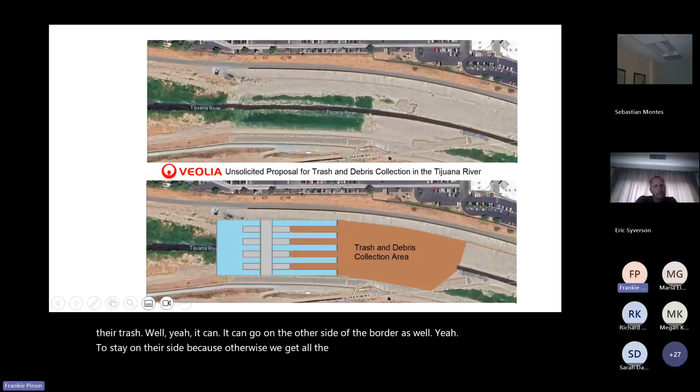Yeah, as for the canyon collectors, they're gonna have to do the same thing. So, you'd chain link across there or heavy stuff, and you would stop the refrigerators and a lot of the stuff. If you had really big squares, you'd stop the big stuff there. Then you have smaller squares and smaller squares, and you can do the little fine stuff over on this side.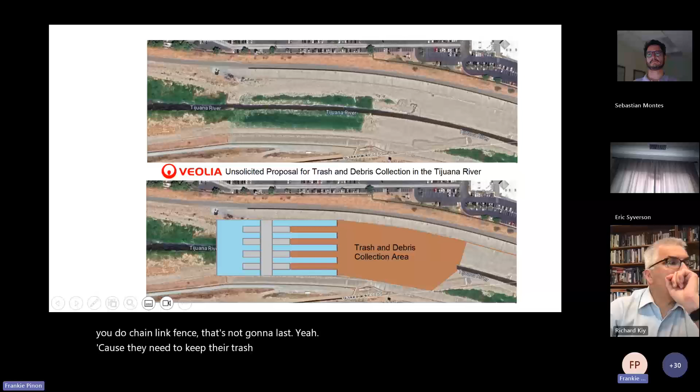If you do something like fence, that's not gonna last. Okay, not chain link, but yeah, yeah, yeah. Not that, because they need to keep their trash. They need to dispose of it somehow, or recycle it, because we can plug up all the canyons too. I'd like to do that, plug up all the canyons.

Yeah, that does. Yeah. This will keep the trash from going anywhere, but the thing is, you think it's gonna be put in Mexico?

Yeah. Everything you said, well, it's up to sewage or trash, but same answer.

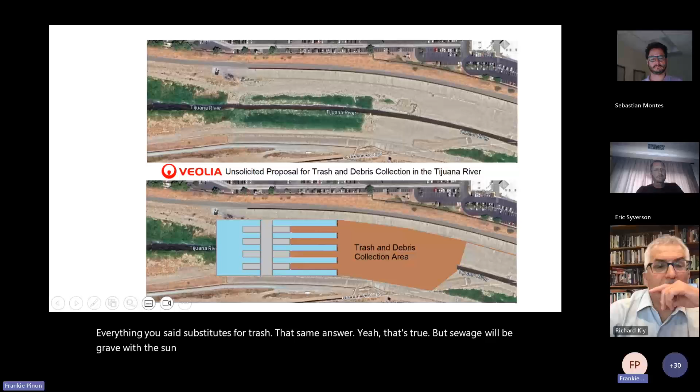Yeah, that's true, but sewage will degrade with the sun, and it's watering all those things in the valley that are growing, which you don't really want. You don't want it as water, because it's killing the fish. I get that, but we can't stop the water, but we could stop the trash.

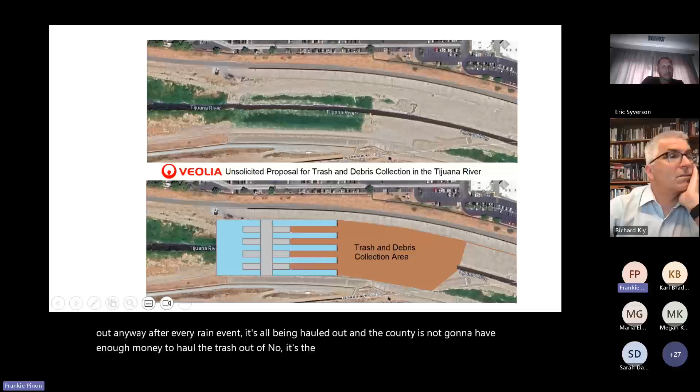Veolia is paying for it. It's part of our stuff at IBWC, and with the last rain events, we've had 70,000 just for one rain event, just to clean out the trash. Here, we can protect our investment and the canyon collectors, the lift stations, Hollister. You get that fine silt and clay coming through that's destroying all our pumps. So it's good if you can stop that and protect those pumps, because every time they go out, you just get more pollution through the valley.

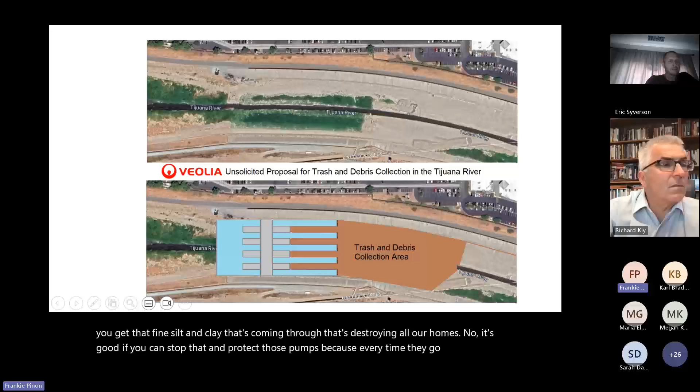But I'm just saying there should be an arrangement with Mexico that you tell them we're not taking the trash anymore, and they need to deal with it. They need to stop throwing it in their rivers. Yeah, that's true. That's what the State Department should be for.

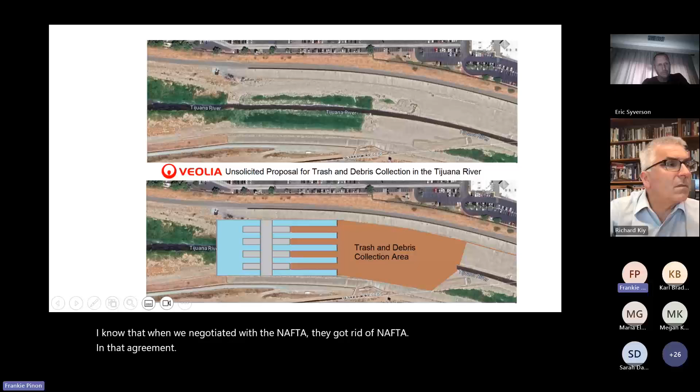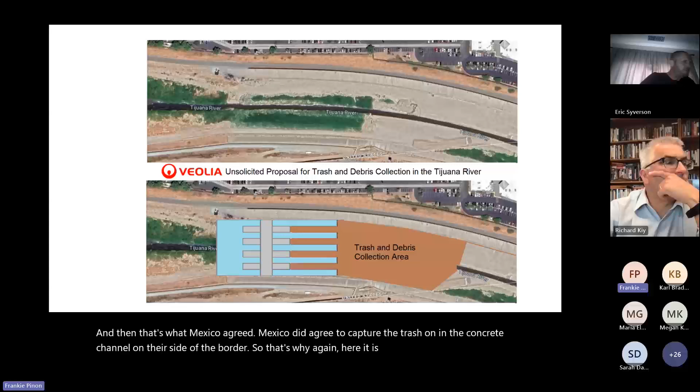And there was a drawing made of what the K-rails are. The K-rails are used on highways to prevent, and there was like a fish gill. And that's what Mexico agreed to. Mexico did agree to capture the trash in the concrete channel on their side of the border. So that's why, again, here it is four years later, and they're not carrying through with their agreement.

And so I appreciate the thinking outside of the box here. Well, there's no problem moving over to Mexico and giving it to them. That's just the concept of how to not destroy the river, the river water flow.

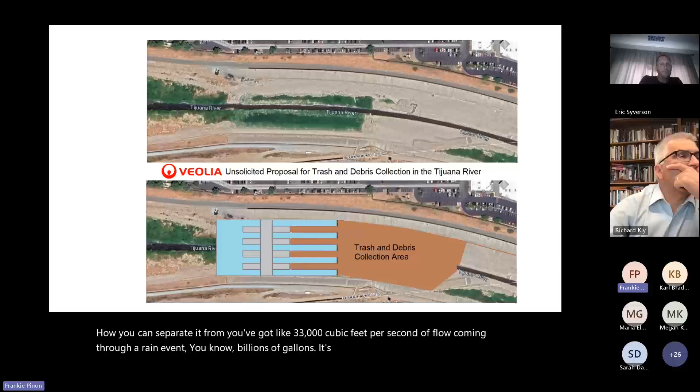As for the sand and debris that's normally carried through, how do you separate it? You got like 33,000 cubic feet per second of flow coming through a rain event, billions of gallons. It's hard to control. Can't fight against nature, which is another reason you should put your river back to where it was.

Homeland Security, okay, who cares? Now there's enough people here. We just said let's go do it. Clean up the channel and get it done. Ask permission later.

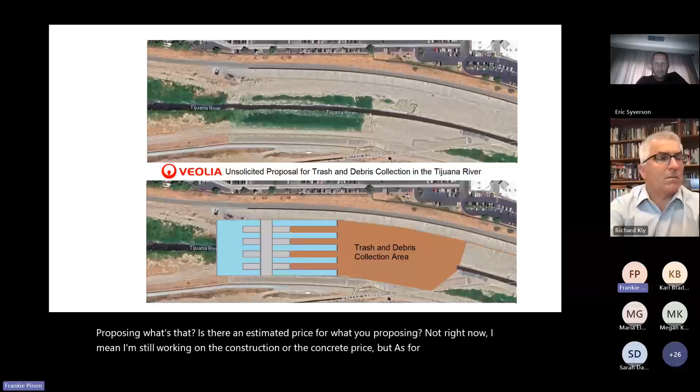Closing? And is there an estimated price for what you're proposing? Not right now. I'm still working on the construction or the concrete price, but as for the filter itself, we got some rough estimates. It all depends on how high to build it. So you can build it in stages, say the first four feet or whatever, and then when more funding is available, you can make it higher.

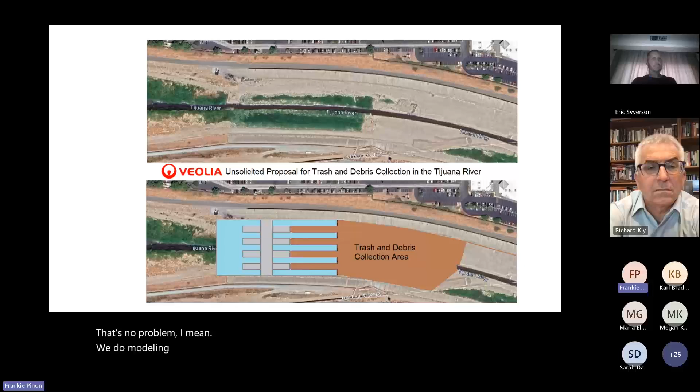In the concrete channels where you got it. Yeah, you're right. Oh yeah, you're absolutely right. And move it over to Mexico, so that's no problem. We do modeling and see if it works. I have some prototypes of the filter itself, where you can just run tests on it all day and see what it does, how it works, and go from there.

You're the bright spot for tonight, you know that? You go tell your wife. Yeah, so.

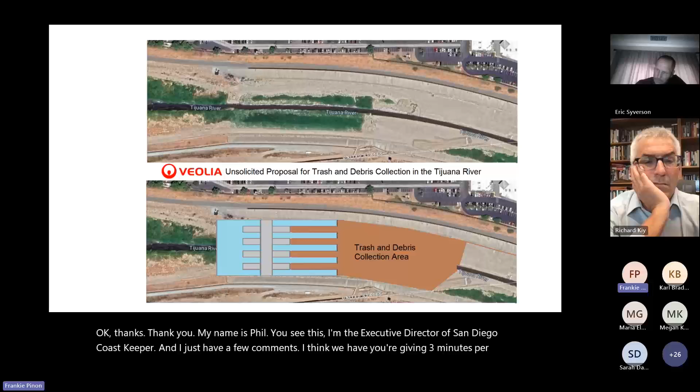Thank you. My name is Phillip Musegaas, executive director of San Diego Coastkeeper. I have a few comments. I think you're giving 3 minutes per commenter, is that right? Yes. Okay, so Coastkeeper, if some of you don't know, is a nonprofit environmental organization.

Our mission is to protect and restore our coastal and inland waters. We've been involved on the Tijuana pollution issue for the past little over a year now. We weren't involved before, but we're heavily involved now. We appreciate the time to give public comment, and we thank IBWC for giving this update.

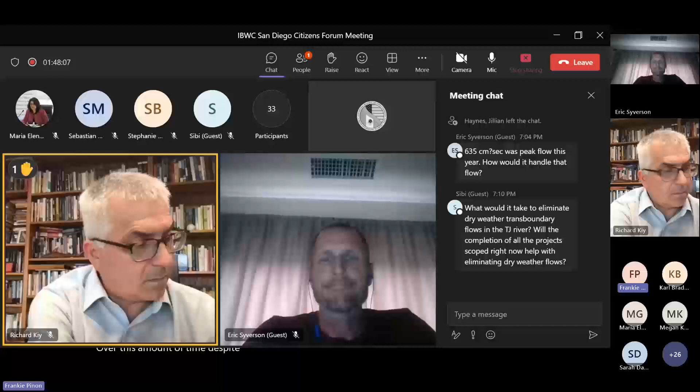But frankly, we're appalled. This is outrageous that we've had this little progress for this amount of time, despite the large infusion of federal funding we've seen, over $400 million over the past 3 years. We need to see more progress.

To give you a sense of what we're doing, Coastkeeper filed a lawsuit in federal court in April of this year against IBWC and against Veolia for permit violations. Morgan talked about the NPDES, the National Pollutant Discharge Elimination System permit, a Clean Water Act permit administered by the San Diego Regional Water Quality Control Board. We did research on the permit and compliance, and IBWC has had over 600 violations of that permit over the past 5 years. Veolia is the operator of that facility, so Veolia is also named in our lawsuit.

And this is not just sewage discharges or sewage violations. These are violations of permit effluent limits on toxic and hazardous chemicals like PCBs, DDT, pesticides, and all kinds of other materials. Many of these chemicals have been banned in the US since the 1970s.

Even when the treatment plant is operating properly, our understanding is those chemicals come into the plant from wastewater in Mexico. They are not treated—a typical wastewater treatment plant isn't designed to treat those kinds of chemicals. So much of that is passed through and discharged into the ocean, or if it's not coming to the plant, it's going downriver into the ocean.

So we're seeing a huge ecological impact. We're seeing a huge public health impact. We have growing evidence that this river of sewage we're dealing with is being aerosolized—the bacteria and contaminants in the sewage are being aerosolized and breathed in by people in Imperial Beach.